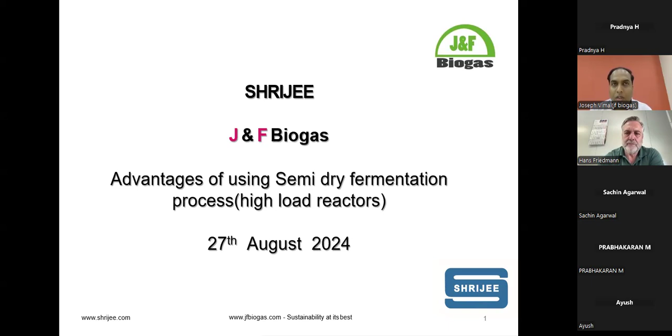Yeah, thank you very much, Sachin. A very good afternoon to everyone. I hope you can see the screen now, full screen. The topic of this webinar is going to be based on using semi-dry fermentation, also called high-load reactors, for solid feedstocks. What are the advantages of using this specific technology over other solutions available currently in the market?

So about the CSTR-based semi-dry fermentation technology, CSTR is nothing but continuously stirred tank reactor, which most of you would be knowing very well. And you might have heard about wet process, plug flow process, two or three different technologies. Our specialization is offering something called semi-dry. We call it semi-dry because we don't add much water, or no water at all, into the system for digestion. High organic loading is done into the system to achieve this specific process. This process is suitable for feedstocks like paddy straw, press mud, cane trash, napier grass, and other agro waste.

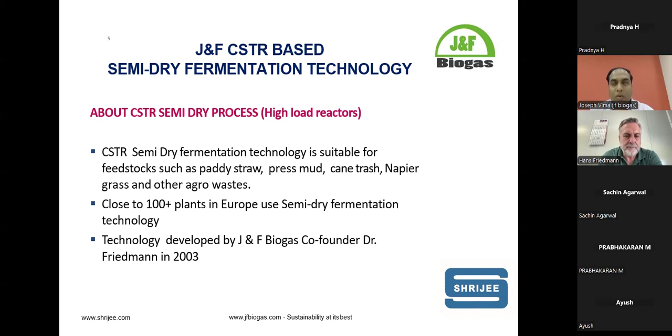Close to 100 plus plants are in operation across the world based on this technology. The technology was developed by J&F co-founder Dr. Hans Friedmann in 2003-2004. I would now move to the next slide. I would let Dr. Hans explain the conceptualization of this technology, and what are the advantages of this, and how it can be applied in the context of the Indian biogas industry.

Thank you, Joseph. The development goal of that technology was to reduce the investment costs and the footprint of the plant designed for these special dry feedstocks. In Germany, we designed this for maize silage, grass silage, and others, for the upcoming new renewable energy law in Germany in 2004, by using the right mixing technology to mix also very high viscous digester content. As a result, we have only half of the needed digester size in comparison to the usual wet fermentation process. Half of the digester size means half of the footprint, half of the concrete of course, and half of the electricity for mixing the digester.

That reduces the operation costs. About 50% of the energy costs of operating a biogas plant is only mixing the digester, and that is reduced drastically by the semi-dry fermentation technology. Another aspect of this development was that we were able to repower existing plants with our process. We only have to change the mixing system, put a little bit of process intelligence in the plant, and we can, without any problem, double the gas output, of course handling double the feedstock input for the existing digester. So that means a drastic increase of profitability and efficiency of existing plants.

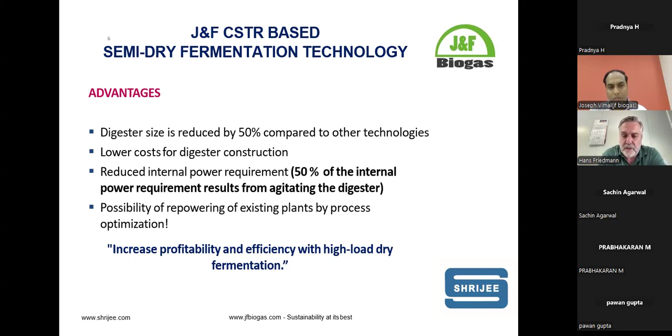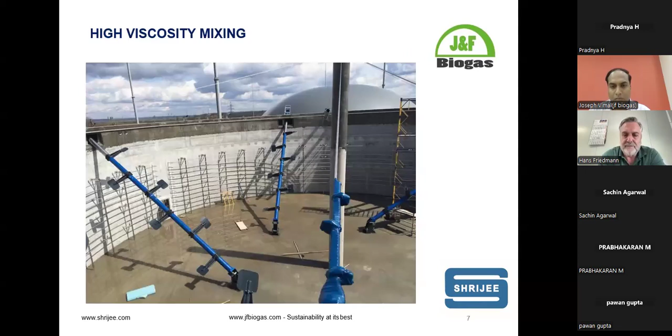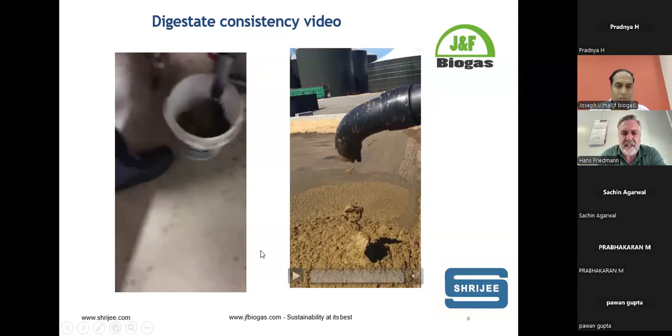What you see here is sampling in my own biogas plant, constructed in 2008, using only solid feedstocks like maize, grass silage, triticale silage, and grain residues. The material is very thick, about 17% dry matter. In the second video, you see a mixture of straw with manure digested, also about 17% dry matter. It's pumpable, but you need the right pumps to move this material from the digester to the other tanks, to the separation system in that case. And of course, the mixer must be able to handle this to get the liquid out of the digester.

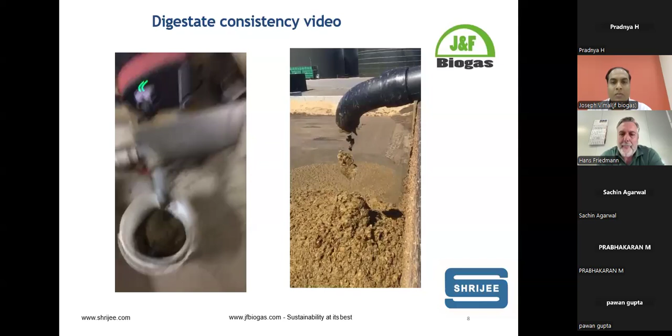Thank you, Hans. So when it comes to feedstocks, now we will go through the potential feedstocks which can be used in this CSTR semi-dry process.

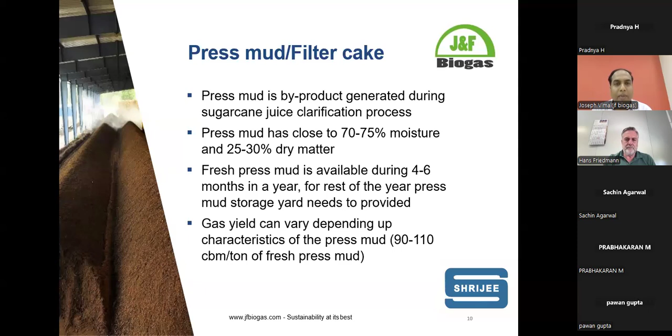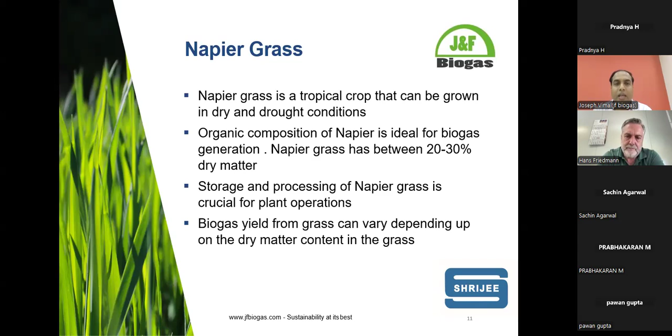With our specific technology, no pre-treatment is required for Napier grass digestion, compared to a wet fermentation process where you need pulping machines, shredders, or grinders to make a pulp, mix it with water, and pump it into the digester. That's not required in our specific process. The right way is to store it in a silo and feed it directly into the feeding system. For solids feeding, we always use a solids feeder, a container of about 50 or 80 cubic meters depending on plant size. The advantage of this solids feeder is that it eliminates pulping machinery, pre-treatment equipment, agitators, and pumps. This is a straightforward, proven process used across the world, and specifically in Germany.

In our process, we always use a solids feeder because we don't use any pulping or pumping with water. This is one of the advantages of this process. From the solids feeder, the feedstock is taken directly into the digester using a screw conveying system. So the whole pre-treatment and feeding process becomes very compact, very simple, and most importantly automized, requiring minimal manpower for the whole pre-treatment.

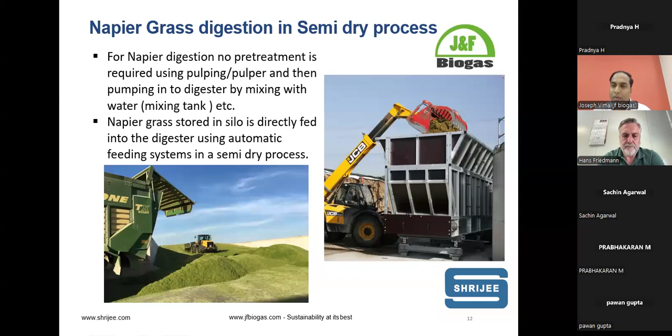Next, cane trash - another solid feedstock which is good for biogas generation. Cane trash is only available when cane harvesting is happening, for those 4 to 6 months, so the right storage method needs to be used. The yield from cane trash can vary between 300 to 330 cubic meters per ton.

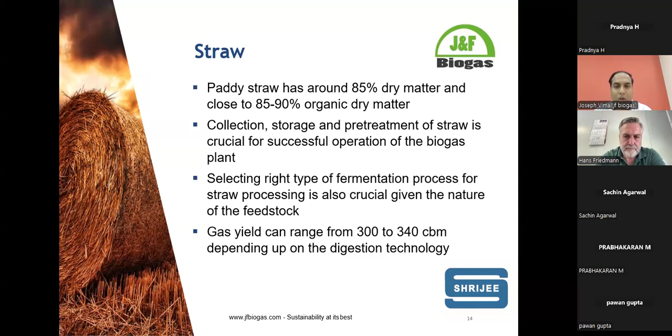Then straw. Straw is one of the most talked about feedstocks in India, which has been tried and implemented in the last 2-3 years. Many plants have come up, are under construction, or commissioned currently using straw. Straw is a feedstock where the right pre-treatment is required for successful operation. So I'd let Dr. Hans take over when it comes to paddy straw, to talk a little about straw and the crucial factors in digestion of straw and cane trash.

Straw and cane trash - doesn't matter which type of straw, whether wheat straw, rice straw, cane trash, even all dry materials - if they have a high content of cellulose, they are very good feedstocks for the biogas plant. The bacteria use the cellulose and hemicellulose to produce biogas.

There are some points you have to take care of for pre-treatment and digestion. One point is you must find the right storage way for the feedstock - baling, keeping it dry to avoid biological processes in the material. Before you put it into the digester, you must shred it in the right way. It's not important to shred it as fine as possible - more important is the right digestion process and the right micronutrient delivery.

This straw is very low in micronutrients, which the bacteria need to do their job to produce biogas. We must add a very small amount, but it's very important - mandatory for this process. And of course, the digester must work well. We must have the right mixers to keep the material homogeneous throughout the digester.

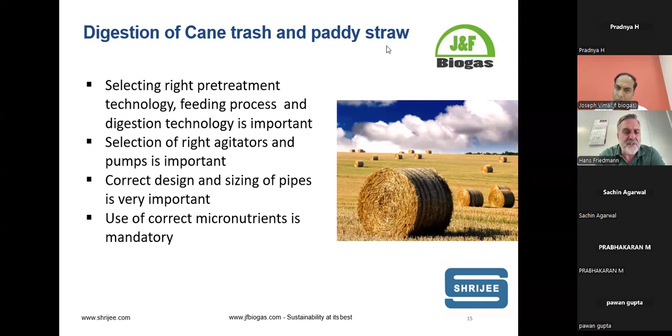Another point is the sizing and selection of the pumps and pipes. With this high viscosity, only a few pumps on the market are able to do the job long-term in a safe and good way. According to these pumps, you must size the pipes - that's one of the miracles of the technology we use. Without experience with these points, the plants won't be successful.

Then of course comes the multi-feedstock plants. A multi-feedstock plant is very crucial, because when someone is planning as an investor or owner of the biogas plant, it's always better to think about diversified feedstocks. One might have a feedstock which is the major proportion of the mix, but when designing the digesters, it's better to design for what could come in future based on availability of feedstock.

A multi-feedstock digestion process is also best workable using this semi-dry fermentation process, because of the nature of the mixing system we use, which can handle dry matter and consistency across a wide range. But of course, one has to do the right sizing of digesters and systems based on available feedstocks, considering at least the baseline numbers for the combination of feedstocks for digestion.

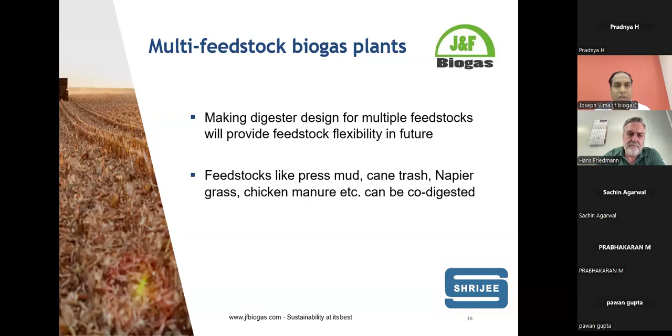One important thing we'd like to touch upon briefly is the storage yard for press mud or any other feedstock. What we see currently in India is that storage principles have not been applied in most plants, because storage is very important long-term - as an investment it might be slightly higher, but for gas yield and maintaining consistency, like in feedstock such as press mud, where availability is limited to 4 to 5 months, it's important to have the right storage method and systems for generating consistent gas all through the year.

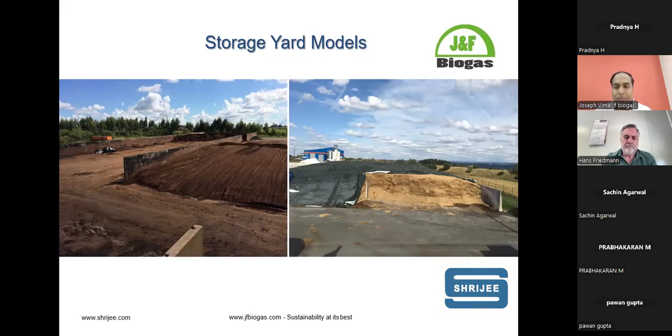And also the next crucial aspect is the gas yield. So perhaps I'll let Dr. Hans touch upon this point - how do we handle the gas yield part, how do we measure this, and how do we do the measurements from the gas plant.

The gas yield in the feedstock depends on the composition of the feedstock. The first parameter is the dry matter - water doesn't make gas, only the organics. And also the inorganics in the feedstock don't make gas, only the organic. So the organic dry matter is the major part to produce the gas. From this organic part, the lignin also doesn't make biogas - only the cellulose, hemicellulose, and other organics like proteins make the gas.

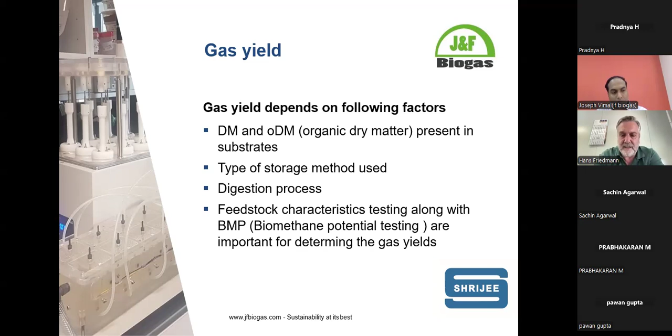So next is a comparison of a typical CSTR semi-dry fermentation process and a wet process or plug flow digestion process - just to give an example of how the system works. So if you take a 200 ton press mud capacity plant, the digester sizing using semi-dry fermentation would be around 6,300 cubic meters. If you take comparative technologies, the digester size would typically be 2x or even 3x the sizing required compared to our specific process.

Which means, one, we are saving power. Why do I say power? Because we are cutting down the number of agitators by 50% - instead of having 10 agitators, we are limiting it to 5 agitators in one digester, and we are limiting the civil works since there are 2 digesters - there is a decrease in the amount of civil works required. And when I talk about agitators, the main thing is power consumption, because your digester power will be technically reduced by 50%, which means you will have a very good impact on the OPEX of the plant over a long-term horizon of, let's say, 20 or 25 years of the plant's lifetime.

And next comes the water usage. With this specific process, taking feedstock like press mud or Napier grass, the water required will be very minimal - say maximum 10 cubic meters, with a consistency of 75% moisture and so on. In other processes, typically you need to mix water in a 1:1 ratio, or recirculate the slurry back into the mixing pit and dilute it up to, say, 8 to 10% dry matter to make it pumpable into the digester.

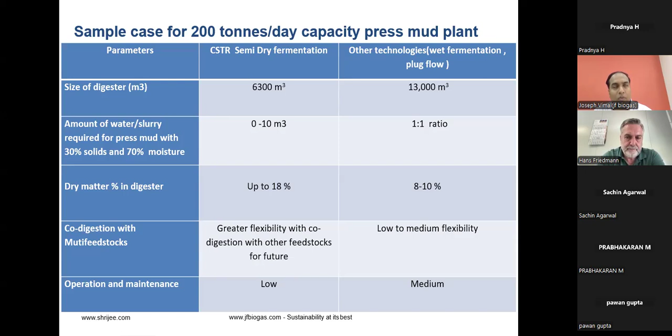So this is a very typical process flow for a wet process versus semi-dry process. As I said earlier, let's take a 200 ton press mud or a 200 ton Napier plant. It's almost the same sizing. In a wet process, you would have 2 digesters of 6,300 cubic meter. In a semi-dry process, we would have one single digester, which means your power consumption, civil cost and everything is coming down.

Also, in a wet process, you need to use multiple pumping systems for pumping into the digester, and mixing or pre-treatment has to be done before pumping. Also, in some feedstocks like press mud, due to its nature, it's very difficult to separate the solids and liquids. One has to use a decanter, for example, for doing the separation, which is of course high cost and high investment.

So I would let Dr. Hans touch upon briefly this usage of decanters in a press mud scenario, and also how we could solve this with our specific solution.

I was working in a Brazilian sugar plant from 2010 to 15, digesting press mud and all the other feedstock you can get in this sugar mill, from cane trash, press mud, spent wash, bagasse. The plant was designed for press mud in mixture with spent wash. First problem, the press mud is easy to store, but spent wash is much more difficult to store in the big amount you need. So during the off season, we didn't have liquid, so we had to provide liquid for the digester to keep it mixable.

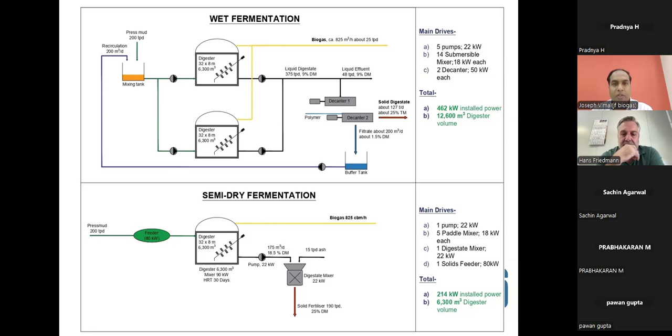The next point is regarding retrofitting existing digesters. We also have experience retrofitting wet fermentation tanks with our own process by changing the agitators and some other equipment like feeding systems. So even existing tanks or digesters from other existing running plants can also be retrofitted with this specific process.

So if someone has two digesters for a plant of, say, 200 tons press mud, they might have two digesters of 6,000. We can convert this technically into double the size. Instead of 200 tons output, we can convert that technically into double the output by retrofitting with the equipment required to increase the size and optimize the plant.

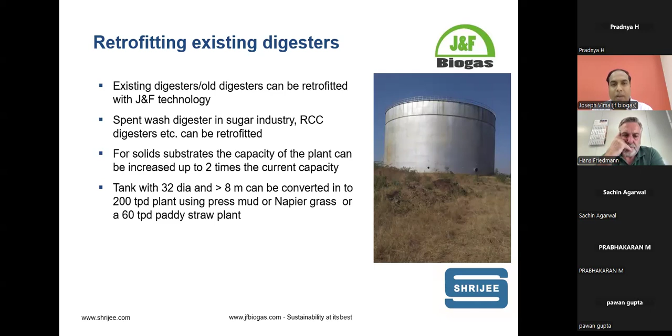So we would briefly go through some of the experiences abroad and also currently our work in India, just to give an idea of our current footprint here in India as well.

Dr. Hans, maybe we can briefly run through the plans, just touching upon a few main points in the different feedstocks. So maybe you want to start with this MSW plant.

Yeah, this is an MSW plant near Berlin in Germany. I was operating it for 10 years, starting 1997. In 2008, it was totally stopped. We were processing source-separated municipal waste from the city of Berlin, together with slaughterhouse waste, supermarket waste, and so on. We produced electricity, 1.3 megawatt electrical power, and the heat of the CHP we used to heat a tire factory nearby.

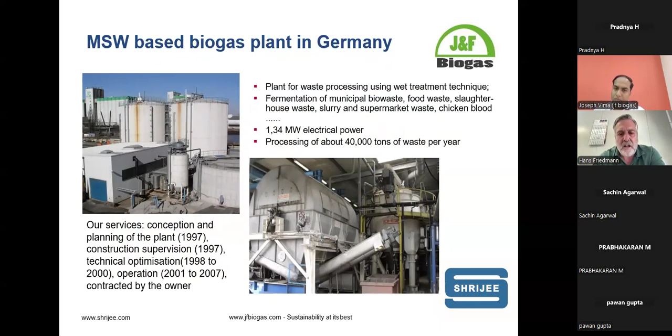The second technology in this waste plant was an automatic separation of impurities. All the plastics, stones, bones, and metals were removed automatically by a pulping system.

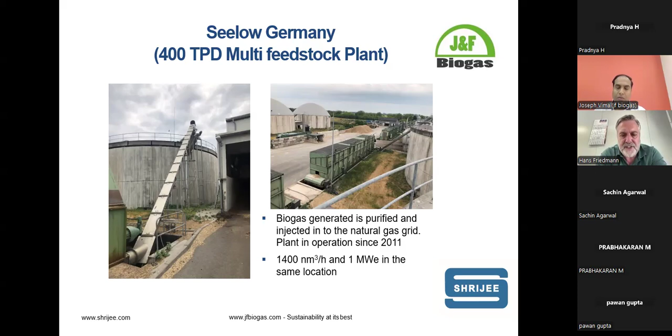Okay, the next plant, the Seelow plant in Germany, is one of the biggest biogas plants in Germany. We made it in 2010-11, and the plant produces about 1,400 normal cubic meters of biomethane per hour, plus 1 megawatt electricity to supply the plant and sell a little bit to the grid. It's also a multi-feedstock plant using different types of silage, energy crops like grass silage, maize silage, triticale silage, and grain residues from the market. The plant has been in operation since 2011, very successful.

That's the plant in Brazil I was working on between 2010 and 15. The plant was processing a mixture of press mud and spent wash. Additionally, we tested bagasse, cane trash, and so on. But in that plant, we designed only a simple submerged mixing system, and that mixing system was not able to handle dry feedstock like the cane trash.

Even the press mud was a challenge. We had to add water, and spent wash as a liquid material, to the mixture of spent wash and press mud. I'm not a fan of this mixture. There are several challenges—one is at the end, the separation to get the fertilizer in solid and liquid form, or recirculate the liquid.

But even more important is the high sulfur content in the spent wash. If you mix this spent wash with the press mud, you have a big challenge in cleaning the biogas for CBG production. So therefore, I recommend not mixing spent wash with press mud.

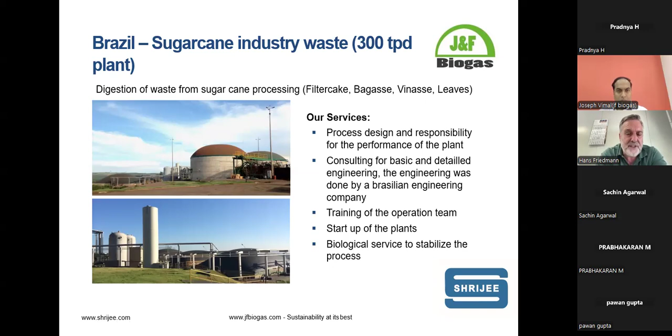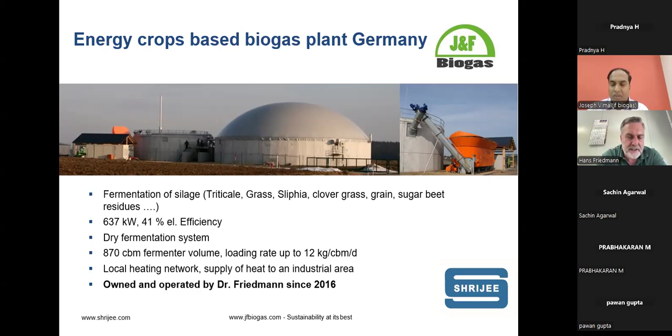The main income is electricity selling. We have a local heat grid to supply industry around the plant also with heat. About 85% of my waste heat is sold to industry.

That's one of the plants we made in Ukraine, between 2018 and 2022, before the war started. That was a wet fermentation plant for pig manure, 1.2 megawatt when we started. In the meantime, it's 3.9 megawatt after adding one of the dry fermentation digesters, 28 by 8 meters. The green block before is the double-size solids feeder with 160 cubic meter volume to feed the feedstock into that digester, and behind it you see the green CHP to produce the electricity.

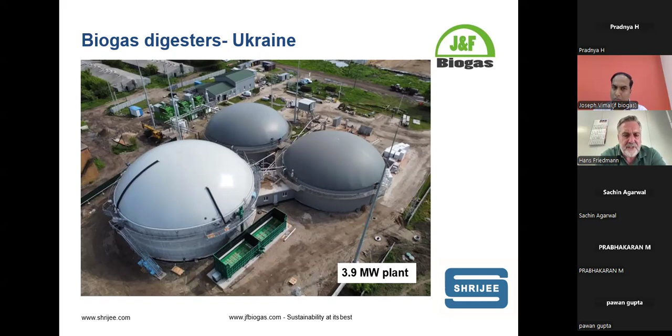So when it comes to the project execution model in India, as Mr. Sachin mentioned, Shrijee has a licensing agreement with J&F Biogas for offering this technology in India. Shrijee will front-end the projects and take the orders and execute them on a turnkey basis, with their vast experience setting up multiple sugar and refinery projects in India and abroad. J&F would supply the basic design and proprietary components for the projects. So the projects will be delivered by Shrijee and J&F to the customers here in India.

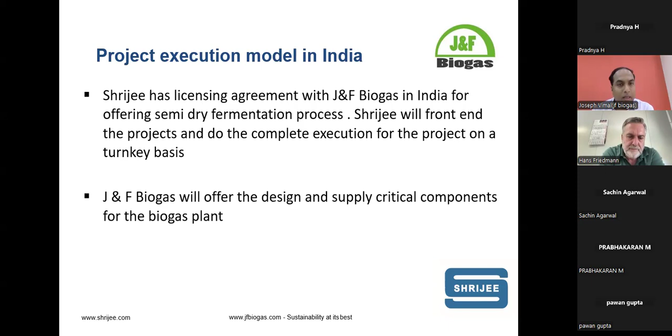To touch upon our project references and ongoing works in India, we are working with one of the investors or EPCs in India on optimizing multiple plants using various feedstocks like paddy straw, cane trash, press mud, and other substrates. That's an optimization contract we have, and that was one of our first projects.

Talking about our own Shrijee J&F Biogas projects, our first project of 12 TPD, extendable to 18 TPD, will be technically commissioned by November this year, at the max by December. So our first plant for operations will be ready in India by end of this year. This will again be a multi-feedstock plant using Napier, paddy straw, and other feedstocks available in the region, and it will be located near Lucknow, just 20 kilometers outside the city. We will keep all interested parties informed about the progress of these projects.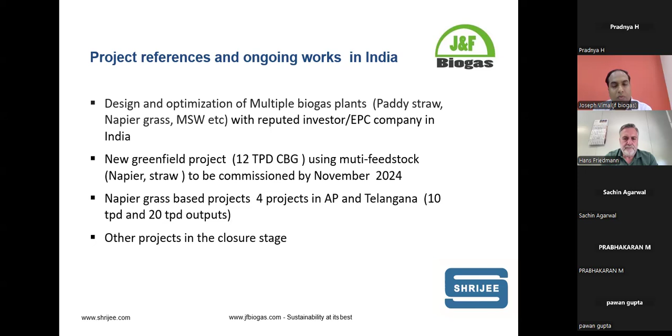Other than that, we are also executing close to 4 Napier grass projects in AP and Telangana, with capacities ranging between 10 tons output up to 20 tons output per day of CBG. There are also several other projects in the closure stage which we are currently working on with our customers in India.